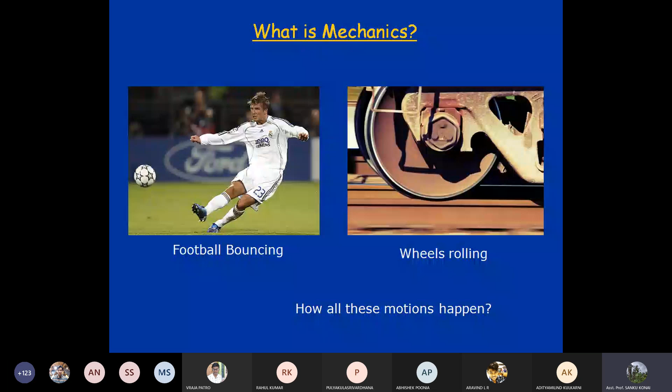All these motions, whatever we have discussed so far, are interactions of different bodies and effects of force acting on the body. What are the interactions? That is friction. If there is friction between two bodies, how is friction controlled? What is the value of frictional force? If there is a force acting on the body, what will be the effect of that force? So this is what controls the motions, and study of this is actually based on mechanics.

The branch of science dealing with the effect of force on bodies is called mechanics. So in this particular course, we'll be studying what will be the effect of forces on any bodies.

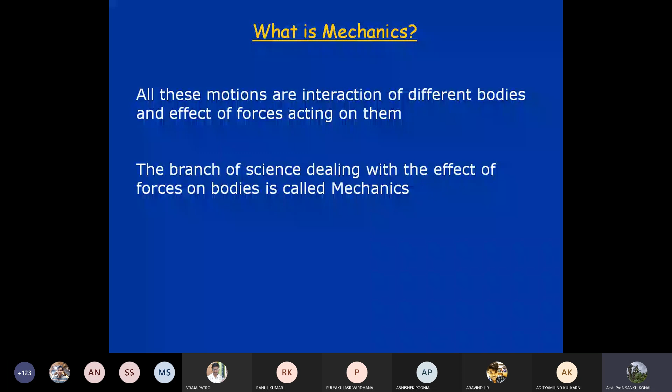Textbooks required for this particular course: this is one good book and very famous, Engineering Mechanics by Timoshenko. This book you can purchase, which is very good. Also for dynamics and statics, Meriam and Kraige - these two books are also very important. You can follow this book.

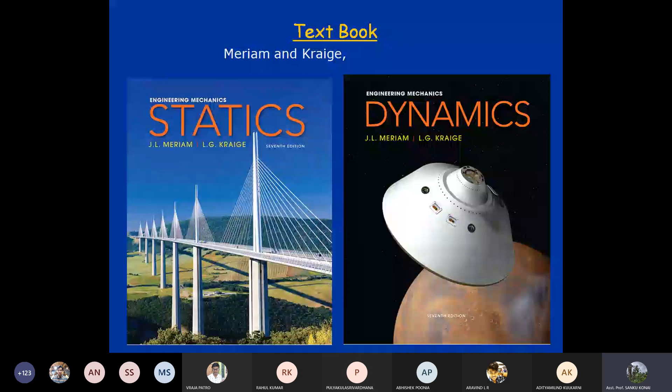Now, if we go into the details of engineering mechanics and how it is classified - if you see in real life, bridges, railways, even if you go to a park you see roller coasters, or cars, or a power plant - all these are coming from application of engineering.

So the prime motive of engineers is to provide comfort and ease to human life, and that is the prime job of engineers - to give solutions to problems.

There are engineering marvels if you go from ancient time - you go to Egypt, you will see the pyramids, the Eiffel Tower, and there are numerous marvels still standing today which carry the marvelous work of engineering.

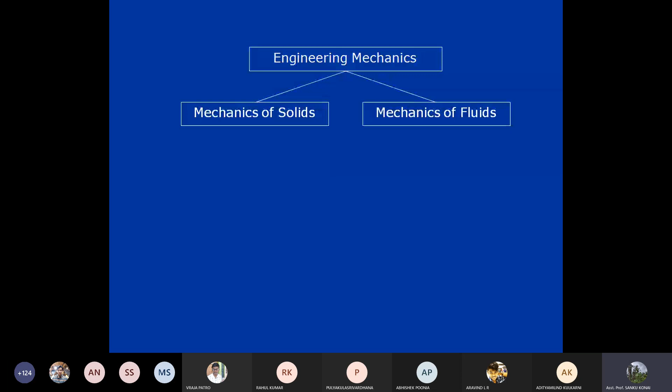Engineering mechanics is divided broadly into two categories: one is solid, one is fluid. In this particular course we will concentrate on the mechanics of solids only, which is also divided into two categories: mechanics of rigid bodies and mechanics of deformable bodies.

There are few engineering branches like civil, mechanical, etc. They have to design beams and columns, and also study the strength of material. So in the future course of time, they have to study the mechanics of deformable bodies. But for this course, we'll be studying mainly mechanics of rigid bodies.

Can any one of you tell me what do you mean by rigid bodies? Anyone? What is a rigid body?

Hello, sir. Hello. The distance between 2 points is constant. What's your name? The rigid body is the body which, when applied by external force, doesn't change the shape. This is also right, but who is the other one?

A body, let's say, in which if you move it, the rigid body is a body in which the distance between 2 points is constant and doesn't change with respect to the point. Yes, distance. You all are right, but let's see this.

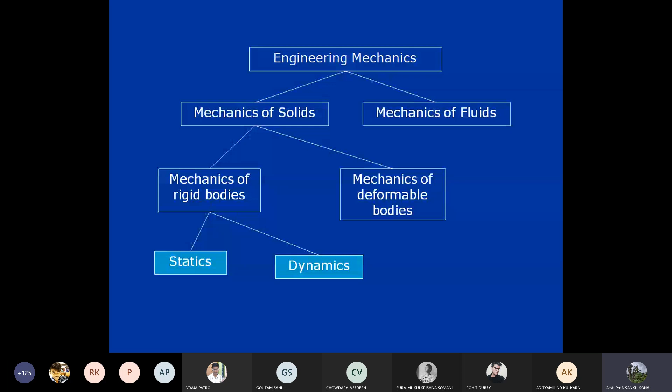Okay, so mechanics of rigid bodies will be studied, and in rigid bodies, mechanics of rigid bodies has two parts: one is statics and dynamics. Dynamics is also divided into two parts, that is kinetics and kinematics. So these things we will mainly study.

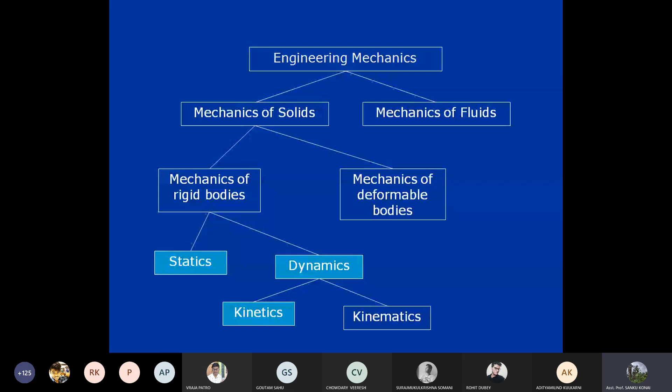Before we go into the details, we need to know some basic units, which are length, time and mass in SI units, that is metre, second and kg. Secondary units are velocity, acceleration and force. Units are metre per second for velocity, metre per second square for acceleration, and Newton for force. This we all know, we have studied.

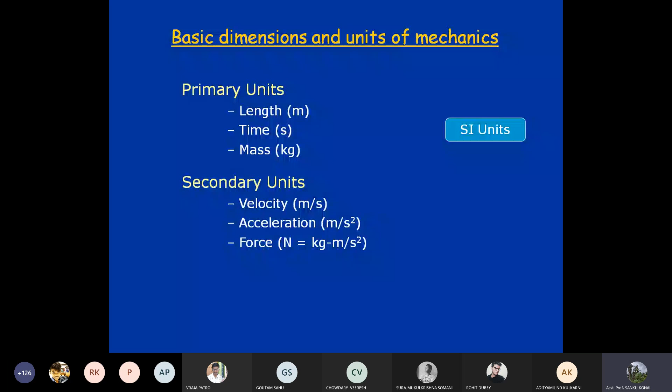So in this particular course, whatever we will go through, you have already been introduced to these topics in your school days, but we will take it further and see how motions, or what the effect of force is, in general terms.

Before we go into details, we need to know certain terms, let's say particle. What is a particle? The idealization of a particle is useful in dealing with the translatory motion of rigid bodies that could have the size of a car or even a planet. For example, while studying planetary motions, sun and planets, moon, a satellite orbiting the earth, seen from the earth, is considered as a particle.

Mainly, a particle generally has negligible dimension compared to the motion of that particular particle.

Let's say you are studying planetary motion, how all the planets move in the solar system. Compared to the motion of the planet, the volume of the planet is negligible. Although the volume of Earth is huge to us, when we study the motion of Earth, how it rotates around the sun, Earth can be taken as a particle, because the distance involved is very high compared to the dimension of the Earth. That's why it is called a particle—negligible dimension compared to the motion in discussion. The assumption ceases to be valid when rotation of rigid bodies is involved.

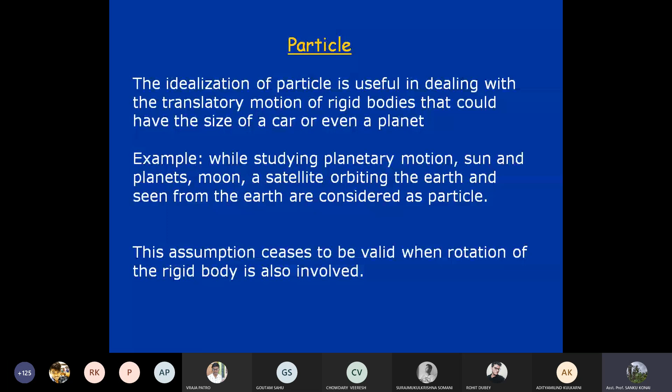Now, about rigid and deformable bodies. In this slide, the two bodies are applied by two forces. If these two bodies are deformable, a shape will be generated and there will certainly be some deformation. But if these two bodies are rigid bodies, then there will be no deformation.

But in nature, if we apply some force to a particle or a body, there will be deformation. Let's say you take a piece of rock and apply some force, you cannot see any deformation. But ideally, in nature, if we apply some force, there will be some amount of deformation which may not be visible to the naked eye. So we can say that in nature, a perfectly rigid body is rare. If you consider any body in nature and apply some load or force, there will be some deformation. So it is said that a perfectly rigid body is very rare.

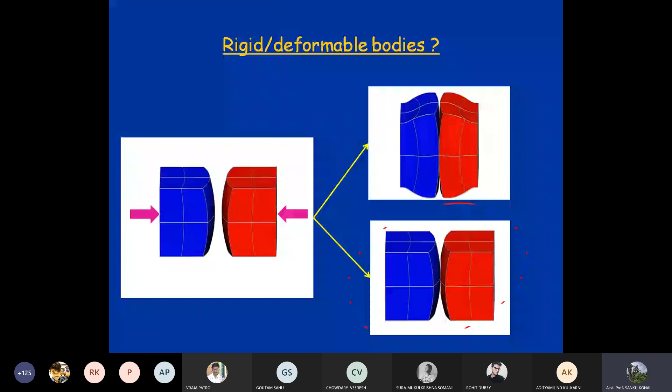But in this particular course, we will be studying rigid bodies. In a beam, a force P is applied. If that beam is rigid, there will be no deformation. But if the beam is flexible in nature and rigidity is less, then you can actually observe the deformation in that beam.

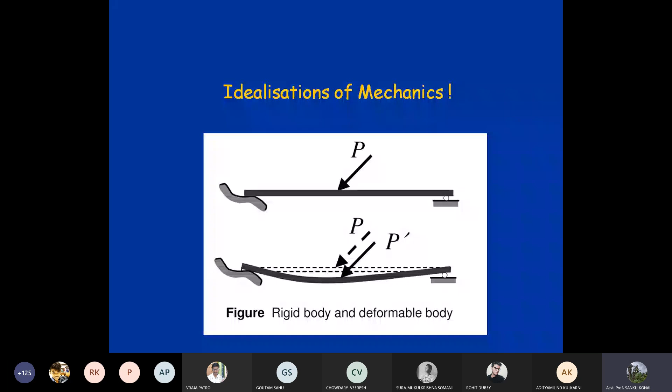As some of you are saying, the relative position of any two particles in a rigid body, or any two points like A and B—if these relative positions don't change under the action of force, then it is called a rigid body. Let's say forces F1, F2, F3 are applied, and the position of the body is changing, but the relative position of the two points or particles is not changing. So that is a rigid body.

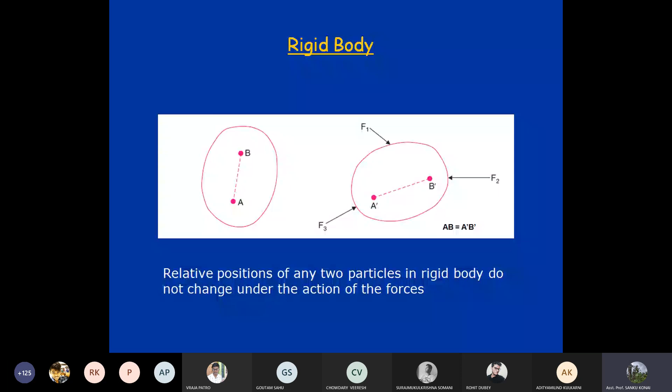A rigid body is defined as a definite amount of matter, the parts of which are fixed in position relative to one another under the application of load. Actually, solid bodies are never truly rigid—they deform under the action of applied forces. In those cases where this deformation is negligible compared to the size of the body...

As I was saying, there will certainly be some voice lagging, some deformation... but please mute your mic. Mute your mic.

If the deformation you are observing is very negligible compared to the dimension of the body, then it can be considered a rigid body.

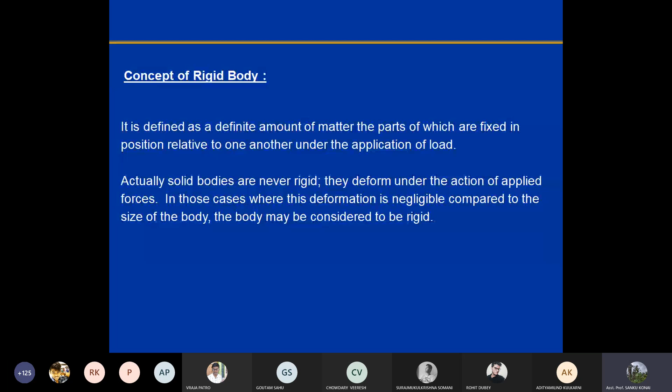As I was discussing about the particle, a body whose dimensions are negligible when compared to the distances involved in the discussion of its motion is called a particle. For example, while studying the motion of the sun and earth, they are considered as particles since their dimensions are small compared to the distance between them. The sun and earth are huge, but when we consider the motion, the distance between them is so huge compared to their dimensions that they can be taken as, or considered as, particles.

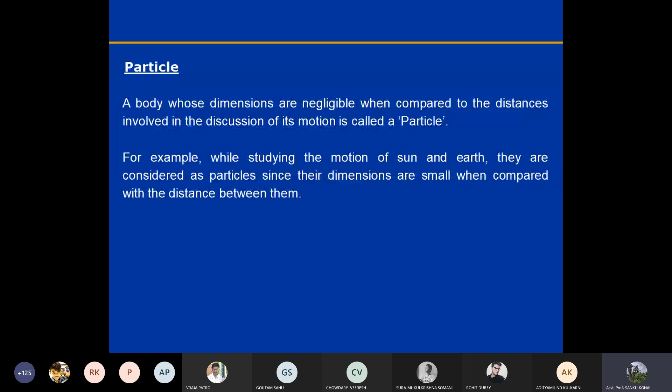So in this particular course, as I had told you, we will be studying the effect—we need to understand what is force, right?

All of you have gone through in your school days the concept of force, scalars, vectors. In this course, in the preliminary classes, we have to repeat all this because based on that only we will solve some problems. But I know you have already gone through this, but still we have to.

But in proper sense, what is force? If I ask you, it is that agent which causes or tends to cause, or changes or tends to change, the state of rest or of the motion of a mass. So from where is it coming? I think you all know this is coming from Newton's law, right? That if a body is in rest condition, if you want to change its state, you need a force. So it is that agent which causes or tends to cause changes, or tends to change the state of rest or of the motion of a mass, is a force, right?

We know force is a vector quantity. A force is fully defined when the following four characteristics are known. What are those? As this is not scalar, this is vector, it will have magnitude and direction, we all know. But apart from that, you need to know where it is acting, because if you don't know the point of application, then the effect of the force will not be known to you. And also you need to know in what sense it is applying, whether it is a compressive force or a tensile force. So that you have to understand.

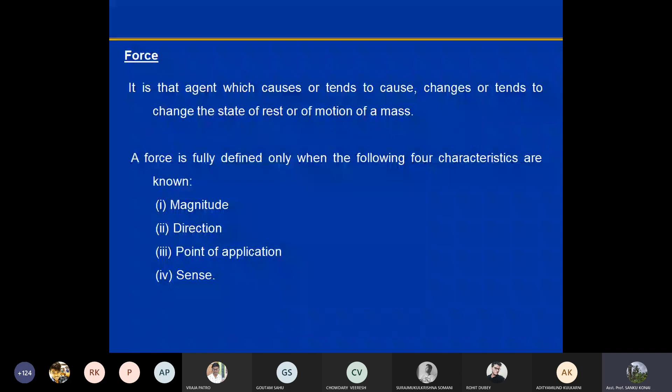So this is, in a proper sense, how a force can be defined. Scalars and vectors, just go through this because you already know. Scalar quantity is only magnitude will be there. In vector, there will be magnitude as well as direction. Like length, area, time will be scalar. Force, velocity, acceleration are termed as vectors because they require direction.

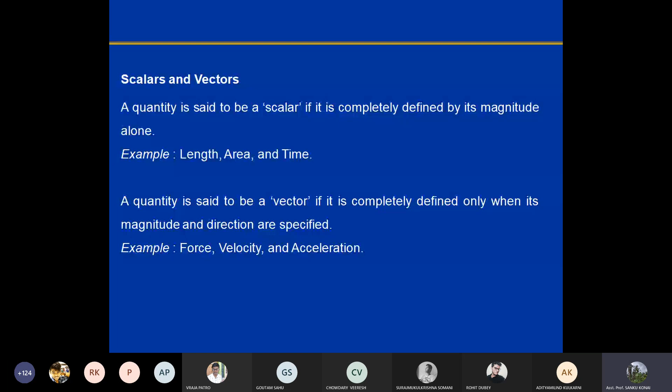So here, actually in this particular course, we will be discussing about forces, scalars, vectors, and then we will certainly enter into the area of equilibrium and all those topics. But as today is the first class, I will stop here. This PPT will be uploaded, okay, and Monday 9 a.m. there will be a class, right?

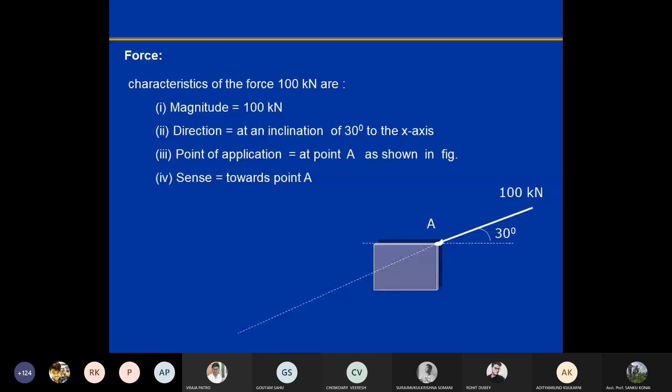So, can you define the tensor quantity? Tensor quantity will come later, okay. Let's say you all know scalar, vector is there, tensor- here only magnitude and direction is there. Let's say if there is one more dimension, one more factor, so it can be nth. We'll discuss about tensor later, okay.

But first, there are so many topics and mechanics doesn't end. Whatever we will be covering here, there are so many topics we can go on and on. But for this particular course, I ask you to just follow the classes first, then we will do the discussion in a later stage when we have some time, because if we go into that detail, then it will never end, right? So first, let's just do the needful - these are the courses, these are the topics we have to study. Then, of course, there is scope for discussion and we will go into those areas, okay. So that's how we will actually conduct this class.